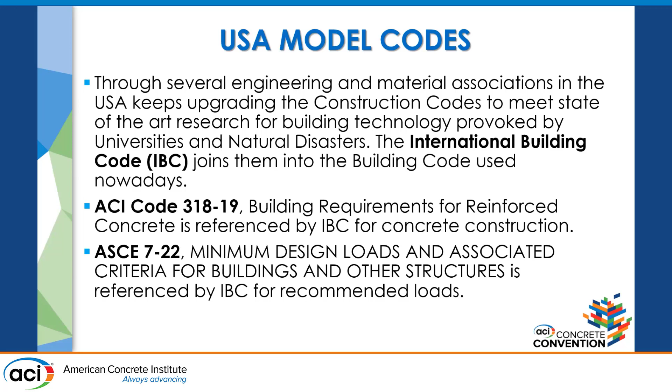Now ACI is working on 318-25, and we just got 318-19 the other day. So I'm going to make a minimum reference to 318-19. I think it's a wonderful code, the best 318 there's ever been. It was a wonderful edition of 318. And recently we got ASCE 7-22. ASCE 7 is a famous code in the United States and in many parts of the world for determining loads for structures, not only gravity, but earthquakes, wind, hurricanes, etc.

And for example, the 318-19 code was extremely influenced by the Chilean earthquake of 2010. That was a major earthquake. We can see a building that had only 3 years since construction. It failed, it broke.

Is there a pointer here? Pretty weak laser. Huh? It's a pretty weak laser. Well, I'll try to point it out anyhow.

You can see on this side, the bases of the wall, they break down and the building falls, okay, during the shaking of the building. Why is it important? Because most of the advances in shear wall design for earthquake buildings started with the Chilean 1985 earthquake. And studies made by Dr. Sharon Wood and other engineers on the Viña del Mar earthquake improved the US design for shear walls.

The Chileans have an extraordinary engineering force. They're good designers. We can see this failure, but only 1% of the buildings failed, and that's pretty low. For an earthquake that was 8.9, and the strong motion lasted 90 seconds, 9-0. It's not like the Caribbean earthquake of 7 seconds strong motion. This is 90 seconds. That's a world of rocking for a structure. So only 1% of buildings failed. So I want to say that on behalf of engineering designers.

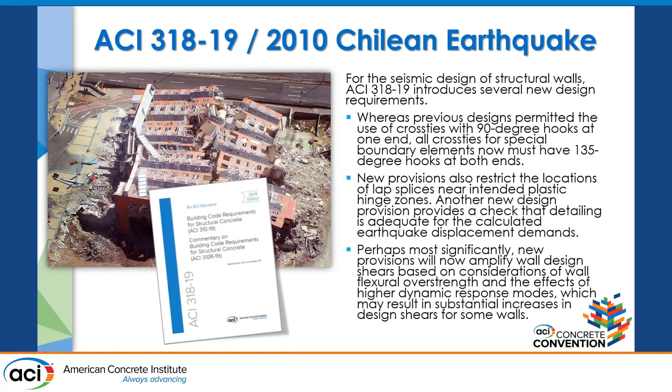And in terms of hurricane forces, in Florida, Miami-Dade County has a great code that, after the big hurricanes, became a standard for many areas in the United States and in the world for impacts during hurricanes, etc. So that's improving for new structures.

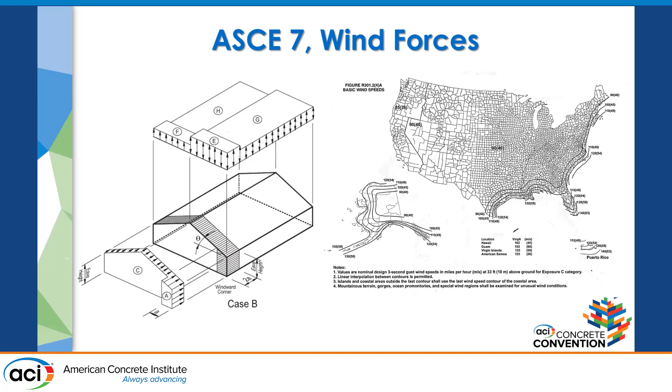And when I first started as an engineer, I was thin and I had a lot of hair at that time. The code requirement for wind design was about 5 pages long. Now you take ASCE 7, it's a whole book in itself just to try to calculate the corner force here. It could take you forever. But what I want to say is that research has been done, has improved, and the performance of structures is significantly better, so they can withstand a great hurricane. So again, learning is a process. We learn, we improve the codes. That's what it is.

My nightmare is tornadoes. And last week there was one in New Orleans, which is not a place for tornadoes, but it was. And you know what terrifies me about tornadoes?

But what happened with the hospitals and the schools that exist in those areas? They're blown away every time a tornado comes. And nothing is done with tornadoes. Okay, so I think that the United States, to prevent collapses and full failures, in addition to work with earthquakes and hurricanes, really has to pay attention to tornadoes.

It's expensive to deal with it? Yes, it is. But we're supposed to be here for providing life safety to people, to be able to survive these great events. In the early 20th century, there were tornadoes where thousands of people died. Now structures are much better, but still a lot of families are left without homes, communities without hospitals, all because these tornadoes are hanging around and we don't pay attention, and the codes neither.

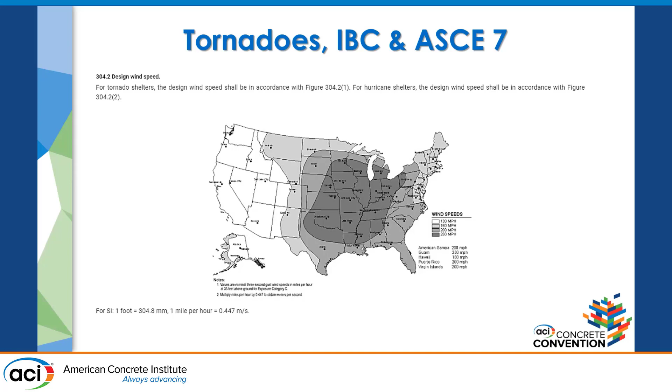So we need to learn from these disasters, and the engineering community and the universities have been doing a great job, except for tornadoes, in terms of learning and improving. Yet, the government or communities are completely blindfolded to existing structures. And we're talking about existing buildings. We improve for the next building, and what happens to the one that exists already? Who is going to pay attention to them?

Recent disaster, what's going to happen with the buildings next to it? Are we really improving to know what to do with them? So we fortified new structures, but then what happened with the neighbors of those structures that may fail too and damage our new structures because they're nearby? We do nothing. And there's no enforcement in the USA as a mandatory upgrading of our infrastructure of buildings, and neither for our infrastructure. So for maybe the highways, there's a program slowly, but I'm going to talk about that later.

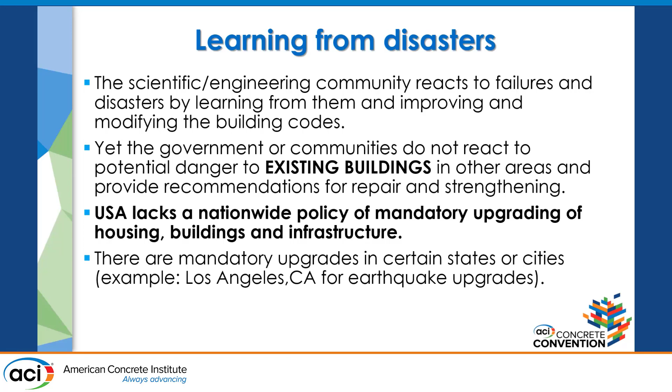So there are some exceptions, like in Los Angeles, as was mentioned before, where mandatory upgrades are made for certain buildings. And they're very strict in their timelines to doing that. And I don't mean that we need to do an earthquake upgrading for all the United States, because where there's no earthquake, we don't have to do that. But we have to do an upgrade on the structures themselves. They're old. They are not forever. And people live in there, and people work in there. And that's our worst fear come together.

For example, using Los Angeles as a great example for mandatory upgrades, two ordinances were approved to take care of soft-story buildings and non-ductile buildings. In terms of earthquake, the soft story is a great peril. There's a lot of probability of failure. Those are buildings that on the first couple of floors, there's not too much stiffness, and then there's stiffness above those. So when the earthquake comes, it becomes like an inverted pendulum, and the building shakes and it falls down. And we have had hundreds of those cases.

And then the non-ductile buildings, older buildings made in concrete, probably prior to 1978, based on ACI codes. There was not enough reinforcement to provide ductility. And ductility is essential to earthquake resistance because it allows the building to go back and forth without really having failure. So of these two ordinances, one of them takes care of what to do with them, and the other one gave the timeline of when to do it.

Okay, so as you stated there, this was in 2015. This year and the beginning of the next, all these buildings must have been rebuilt already. That's the big pressure that was mounted on these two ordinances. And so the schedule is a very aggressive one. It requires that a structural analysis must have been made to the structure 2 years after the ordinance. And then the owner had to have on record the necessary permits for repairing or reinforcing the structure 3.5 years after the ordinance. And the job had to be completed in 7 years. Total time. It's not adding, the total time is 7 years.

This seems great. Economically, in most of the United States, this is not feasible. It's a too aggressive program because it's very easy to say, you have to reinforce your building. Your building is too old. We have improved the resistance, but someone has to pay for it. So personally, and that's what recommendations I'm going to talk about, we need to do it at a slower pace to allow for individuals, companies, housing projects to be able to raise the money.

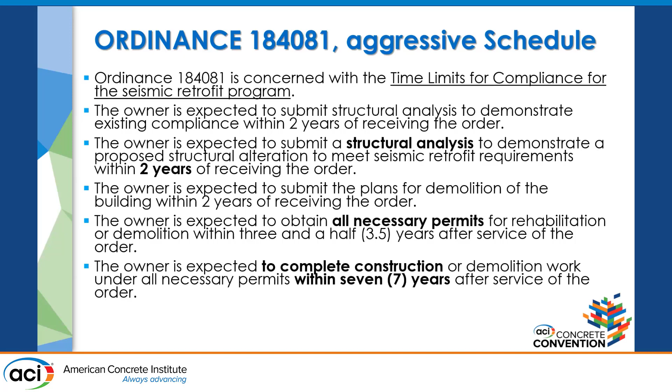Because if we don't do anything like right now, our infrastructure of buildings will keep failing. If we start and it takes us 15 years, well, 15 years from now, we will have a resilient infrastructure. So we must start. So my proposed schedule is based on three things. First, it must apply to everything that is an essential facility, as defined by ASCE 7 and IBC. And essential facilities are hospitals, police stations, general health facilities, schools, emergency management, etc.

Then any structure that holds more than 300 people needs to be done. And finally, any infrastructure that services more than 50,000 people. We forgot about infrastructure because the only thing we remember about water is that we open the tap and water comes out.

Or we go to take a bath and we open it, water is out. There's a whole lot of infrastructure behind that water. So any facility that serves a lot of people needs to be rechecked every number of years and retrofitted, because our lives depend on them.

I was part of a committee evaluating the vulnerability of Puerto Rico in a war. You only need 4 bombs. The 2 main dams and the 2 main power generators, and Puerto Rico is out. Nothing else works. 60% of the population will live without water, and 90% of the population will be without electricity. And that's vulnerability.

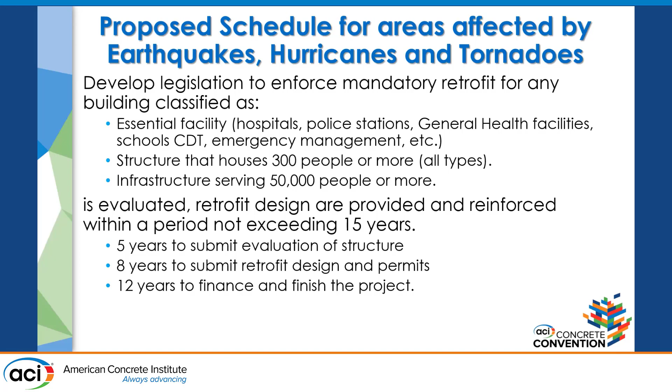I think it's doable. You know, if you want to fight with me and we make it 15 instead of 12, I don't fight. It's okay with me. Then we have resilient structures 15 years from now, but we must start. The difficult part is day one. When are we going to start reinforcing our structures?

And in terms of maintenance and inspection, which has been discussed, I have a more aggressive view. That 40 years, I've been an engineer now for 44 years, and it's too long, 40 years. The structures deteriorate. There are structures that are in extraordinary form, but there are structures that in 5 years are having a lot of problems. And so how can the code predict that? No, it cannot predict it. So we have to have more regular inspections.

So I think that the purpose should be to confirm that the structure is adequate for occupancy, whether it's for living or for having a party or for working. But we need a program to evaluate the adequacy of those structures. And that inspection should be to determine the general condition of the building. If that visual inspection raises a flag, then that opens another story.

In the last 4 years in Puerto Rico, I have seen hundreds of structures because of the 2017 Maria hurricane and the 2020 earthquakes in the southwest of Puerto Rico. And structures will speak, particularly concrete. Concrete speaks more than steel structures. Steel structures sometimes hide their problems a little bit more.

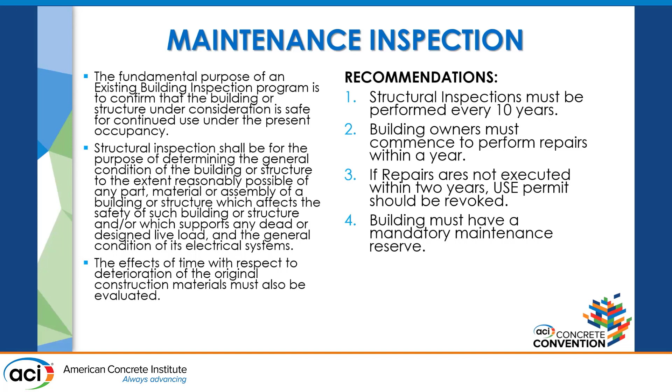And finally, buildings have to have a mandatory reserve calculated on the type and size of building. It has to exist. There's no way to all of a sudden do millions in repairs. People don't have it, but if since the building started you keep accumulating money for the repairs, it can be done. It requires discipline to spend money where it's needed. It's for your own life safety. So those are my recommendations.

And before we finish, on preventing collapses: recently we have had failures of infrastructure in Italy, in Europe, in Asia, in Latin America. And ASCE performs an evaluation every year. The grade for the United States is C-. And that's an average. Certain parts of the infrastructure have a D. And that's where we go every day, over the bridges and on the highways, etc.

So as engineers, not only for buildings, we have to keep pushing the government to assign money for infrastructure. Thank God an appropriation bill on infrastructure was finally approved after 20 years of Republicans and Democrats scratching each other's eyes out so the other side doesn't get a political gain from a bill, while America is failing on infrastructure. No rapid trains, no super high-rise buildings. We are behind the world. And yet we spend trillions of dollars every year. So again, I could not finish without talking about that.